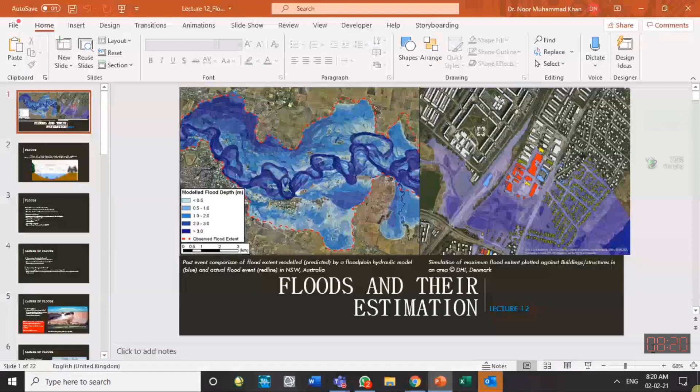In the last part of the previous lecture, we started the topic of floods, and we already informed you what is a flood. It is a high level or high stage in the river. How high? When the level or stage goes beyond the full bank capacity of the main channel. The main channel is in the middle, which remains underwater throughout the year. When water level goes beyond the banks of the main channel, then we say flooding is there.

Initially flood occurs on the flood plains. This area on the sides of the river is called floodplain. Those people living close to the river know the other name for this place. Any person living close to Indus or Chenab, what do they call this place? The area along the river, what do we call that place in local language?

There are sometimes forests over there. So we call this place the Kacha, Kache ka ilaka. That is all along the Indus River on both sides. There is a strip on both sides of the river where flooding occurs frequently, nearly every year. And when flood recedes, the flood water leaves very fertile soil over there, clay and silty soil, and that land is very fertile with respect to crops and agriculture.

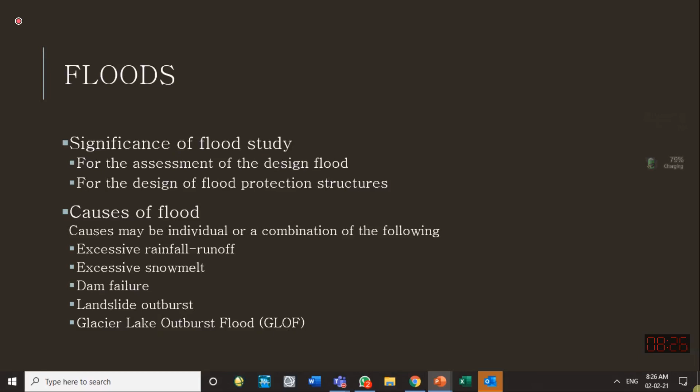A few years back in Pakistan, one GLOF event occurred, and some structures of our newly constructed hydropower were damaged. I think the Batura glacier lake outburst flood was an example of that. Such floods occur in the Himalaya region, in the Karakoram region, which are the source of water for Pakistan. These GLOF events are increasing because of climate change, so we should at least know what GLOF is.

But still, vigilance should be carried out. We have to remain vigilant to see if any symptoms of failure are there or not. So one example of such a landslide...

...reservoir or landslide-made dam is what we call Attabad Lake in Pakistan, in Hunza, on the Hunza River on the Gilgit side. That is still there. I think it was formed in 2005, 2007, or 2010, so about 10 years have gone. The slide has not yet broken, and a beautiful lake has been created there.

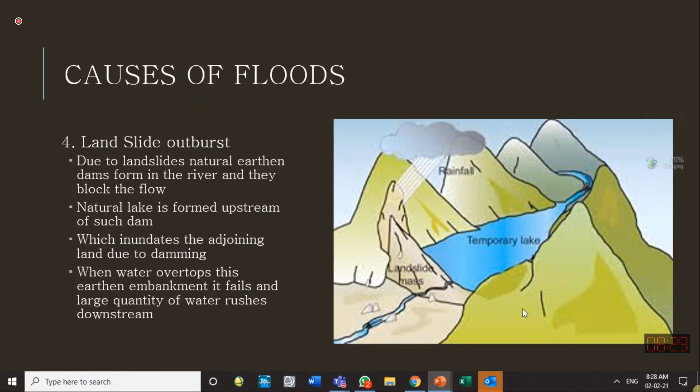For dam break, the landslide and the glacier lake outburst flood, in all of them a dam condition has been created. In GLOF, the dam condition has been created because of the glacier, pieces of the ice broken from the side glacier. While in case of landslide, a whole mass of the hill stops the flow of water in a channel. While in case of dam, our engineers have built an obstruction in the path of the flow. So any of them, if broken, can cause flood downstream. But these should not occur.

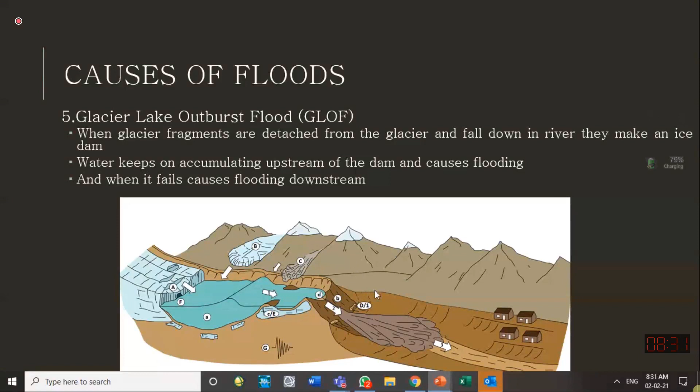They cause huge floods. Normal flooding which we get in Pakistan is because of the huge monsoon rainfall, excessive rainfall. Over here in Punjab, KPK or Sindh, we are getting monsoon flooding. So the season of flooding is July, August, and sometimes September. But in the western part of Pakistan, like Balochistan, the coastal area, sometimes we get the flood not in monsoon season but in February, when the westerlies are strong. Then they get huge flooding, and sometimes dam break flood also occurs in February.

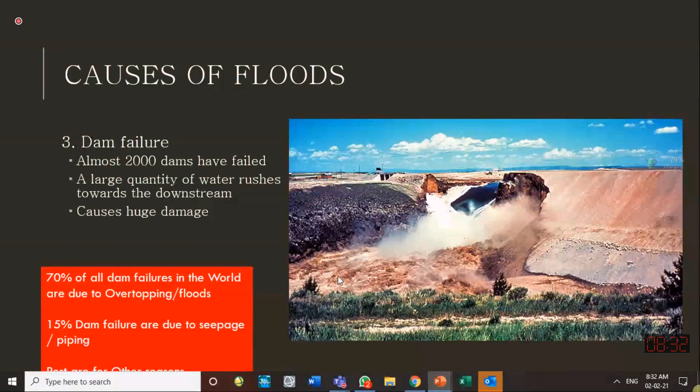So in the eastern and central part of Pakistan and in Sindh, we get flooding in monsoon, but we can also get flooding in winter season because of the heavy western storms. One of the dams failed in Balochistan, named Shadi Kaur Dam. That caused loss of lives, and it failed in February because of the huge rain. The capacity of the spillway was not sufficient. Water flowed over the dam, and when water flows over, dam break occurs. The dam cannot withstand that overflowing water.

So now, knowing what a flood is and why they occur, we engineers are frequently asked to tell the design flood. If you are constructing a new structure, tell us the value of the flood for which this structure should be designed, for which the spillway should be designed, for which the opening within the bridges, how much path of the water I should provide. That controls the length of the bridge. So what should be the design flood?

Depending upon the importance of the structure, there are different ways to decide the possible floods. Some of the methods mentioned here are empirical methods. People have developed equations for estimation of the runoff for any rainfall, like we have studied Khosla, Lacey, and Inglis method for estimation of direct runoff if the rainfall is known. Similarly, people have given equations which tell the value of the peak flood generated by a certain rainfall in a certain region. We cannot have the same equation for all regions, so for different parts of India and Pakistan and the world, equations have been developed.

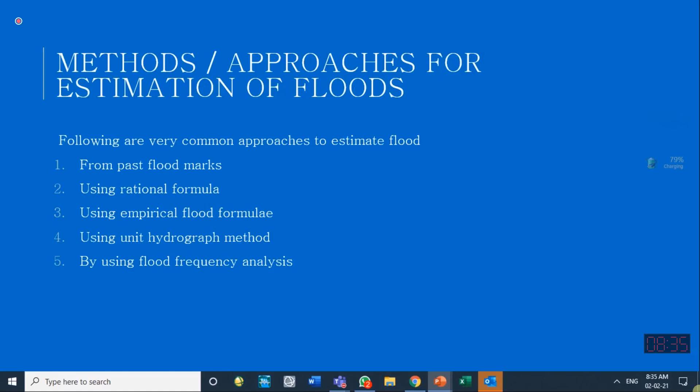So these methods are important, and we should be knowing it, and we should be knowing which one should be used in the area of our interest. And if the historical flood values are not with us, sometimes we go to the site and ask the people of the old age, those are elderly people. We ask them within your memory, within your life history, or what you have heard from your forefathers.

So what was the water level in this area? What was the maximum water level observed in this area for a certain flood? So then they can recall their memory, and they can tell you that during my childhood or during that year, the water level reached in this area up to this level of the house or this level of the tree. So they can mark, or they can give the flood level they have experienced in that area.

So those flood levels, if we gather them from a certain area along a river, we can convert that water level into how much flood might have passed this place using our engineering formula, like Manning's equation. If we know the flow area, if we know the slope, we can estimate the velocity using a suitable Manning's roughness coefficient: v is equal to 1 over n, R power 2/3, S under root.

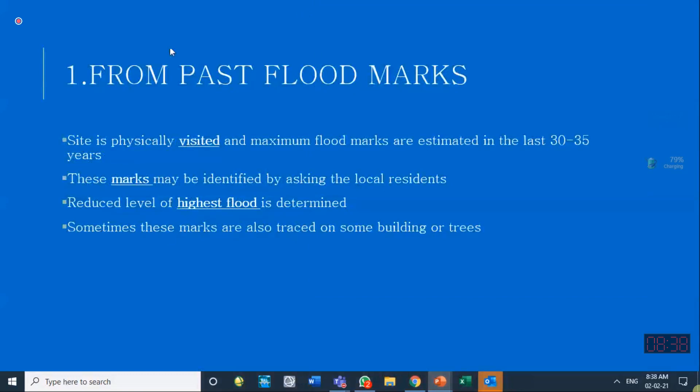And so knowing the average values of n for different kinds of rivers, we can select a suitable n value, and then we can calculate v, the velocity of that flood. If velocity is known, multiplied with the flow area, you get the discharge of that flood. So that is the way. If we don't have the measured discharges at that place, if we don't have a gauging station there, then we can use this flood marks method from the previous flood marks while visiting the area.

But if we have the data of the floods measured there using the gauging station, then that is the best source. That is the best source. So that is what I have talked to you about: if some flood marks are with you, you can mark them on the cross section of that river, find R, have S, and then you can have the velocity, and then discharge can be found.

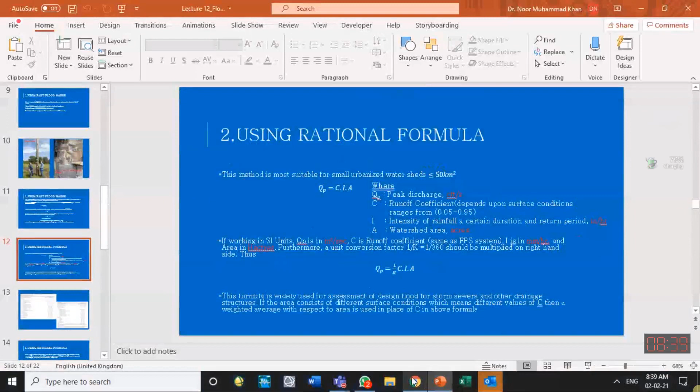One of the mics seems to be on, so please switch off your mics other than me.

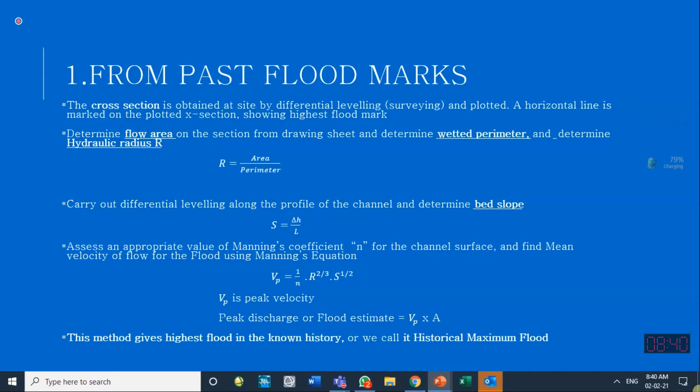Like the rational method we can use for estimating the direct runoff. Similarly, the rational method, this method we studied in flow estimation also. Flood is a special kind of flow, so the same method can be used for estimation of flood peak runoff also. So peak discharge we can estimate as CIA.

This C is the coefficient which is dependent upon the type of the catchment, dependent upon the watershed characteristics, whether it is releasing a lot of flows, whether it is losing a lot of water of the rainfall. I is the intensity of the rainfall for which we want to find the flood. Usually the high flood will be related to the high precipitation levels. So first we select the maximum precipitation for which we want to find the flood. So I is the intensity of the rainfall in a certain duration and return period.

This return period will be discussed later on. There are two ways of selecting the design flood for a certain structure. One is based on the return period, and one is based upon the probable maximum flood. The return period concept is that floods of higher values have less chance of occurrence. So a flood of 100-year return period is expected to occur once in 100 years. So its value will be higher as compared to a flood whose return period is 50 years; that value will be less.

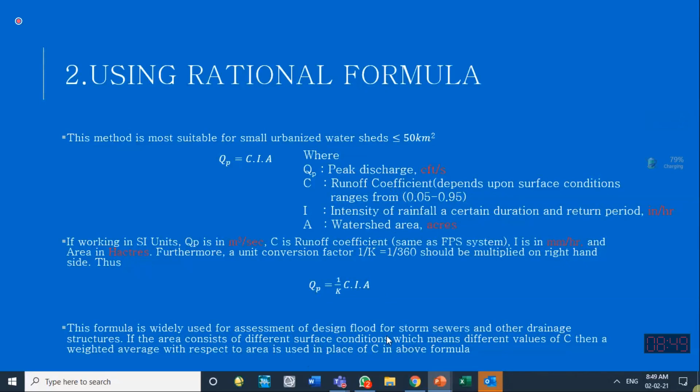So if we have multiple areas, different conditions in the watershed area, then a weighted C value will be calculated. So here is an example. In literature, large tables are available which define the watershed area type and propose a runoff coefficient. This range is also quite high, so we have to use some judgment of our own to select a proper C value. Usually, to avoid any risk, we go for the higher values of C because we are calculating the flood values.

So residential area 0.3 up to 0.75 is possible. Industrial area 0.5 up to 0.9 is possible depending upon how much industrialization is there. So as I say, more impermeable area, higher will be the C value. If 100% is impervious, 0.9, 0.95 can be taken because some evaporation will be there. This table is given by the American Society of Civil Engineers.

So this is one of the methods which people use to calculate the design flood for smaller structures like culverts under the bridges, for designing the urban sewerage system or urban drainage system. People rely on this method heavily. This is quick and this is easy.

So this one question you have to carry out, to calculate the flood peak or flood discharge for an area with the design rainfall. This rainfall is not selected as any rainfall of the previous year. They have thought about for what return period we want to design this structure.

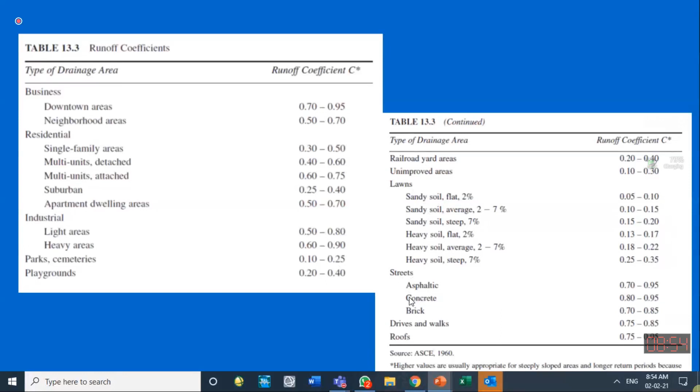So they have given that the C value for the rational method is 0.4 where the forests are there, 90% of the area covered with trees. And there is a 10% area which has no forest, but it has exposed rocks, like an impermeable area. For that, the C value is proposed as 0.8. If you are doing an actual problem, you have to select this C value based upon a visit to that area, knowing which kind of land cover is there, and using the tables available from the American Society of Civil Engineers or other sources.

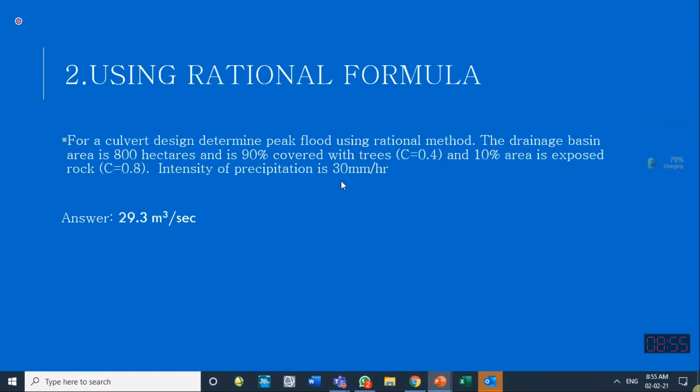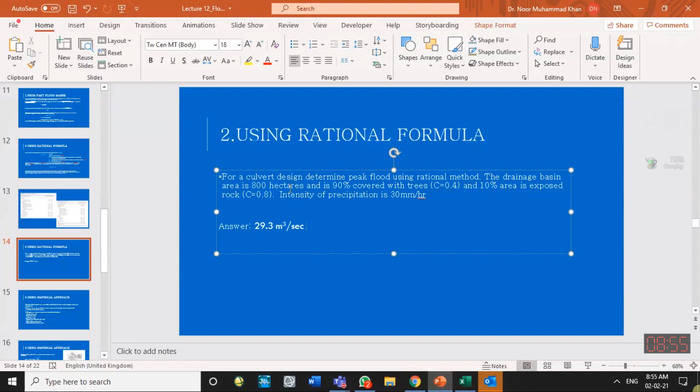So intensity of the rainfall is 30 millimeter per hour. So this has to be calculated. In this formula, use the one which is good for the SI system. And 1 over K times CIA you have to calculate, and take care that you select suitable units. For example, I could have given you area in acres, rainfall in inches per hour, or area in square miles or square kilometers. Then you have to convert them into suitable units; that should be taken care of.

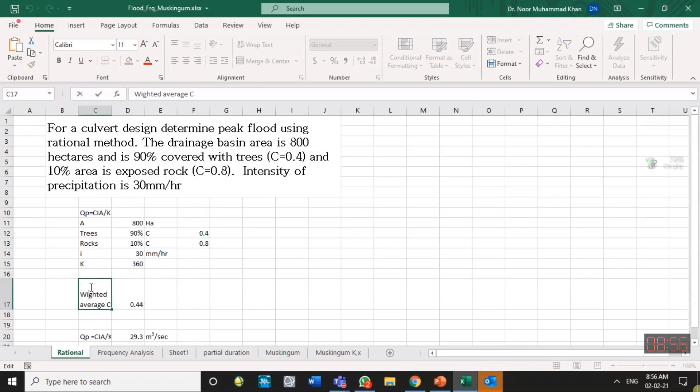So in Excel I have done this same question with the rational method. Area is given for trees, 0.4 is the C value, 90% of the area is covered with trees, 10% area is covered with rocks, its C value is 0.8. So first we have to calculate the weighted or average C value. That is based upon the percentage of the area: we multiply them with the respective C value, and we add them together. For example, 90% multiplied by 0.4 plus 10% multiplied by 0.8 will give me the weighted C value. So that is calculated here.

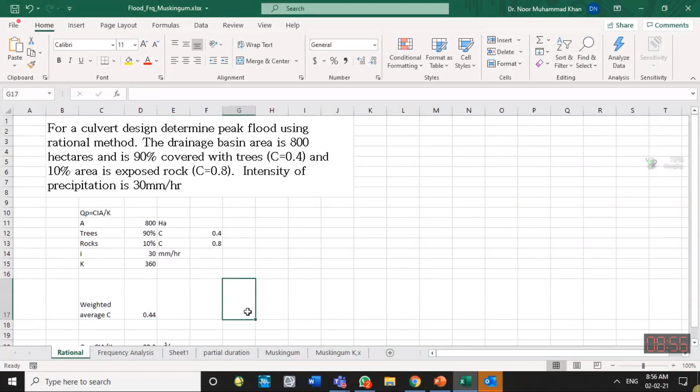So if you have to select it, can somebody check? It comes out to be 0.44 weighted C value: 0.9 into 0.4 plus 0.1 into 0.8.

That comes out to be 0.44. So I put it over here. And then the formula is 1 over K into CIA, or CIA divided by K. So that comes out to be 29.33. Please solve it yourself and try to understand it.

It's a simple method, can be used for smaller structures. Usually if we are doing the design of dams or large structures, then we don't rely on this rational formula. We go for other methods of flood estimation.

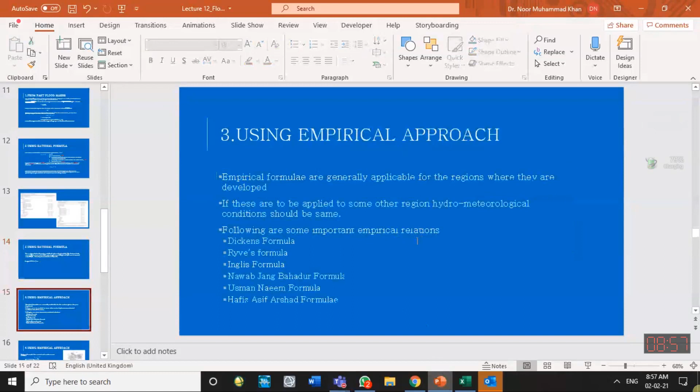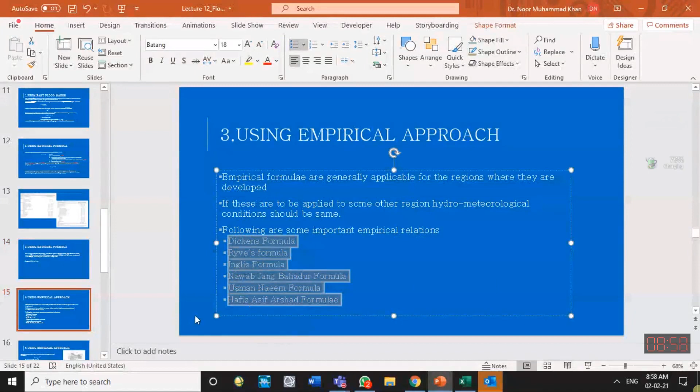Okay, what else? Empirical approaches are there, like Inglis, like Khosla, like Lacey. A number of formulas give us flood values in a certain area. For example, for India, there's a formula known as the Dickens formula. Q peak is equal to a coefficient times area to the power 3 by 4.

So no parameter of rainfall is there because I think that is inbuilt inside it. Depending upon the area, they know how much is the maximum precipitation in that area.

Another formula given by Ryves for the central part of India: if the area is within 80 kilometers from the east coast, then a C value of 6.8 is used. If it is away from the coastal area, 8.5 should be selected, and for other limited areas near hills, 10.2. So he proposed a slightly different formula, C1 into A power 2 by 3.

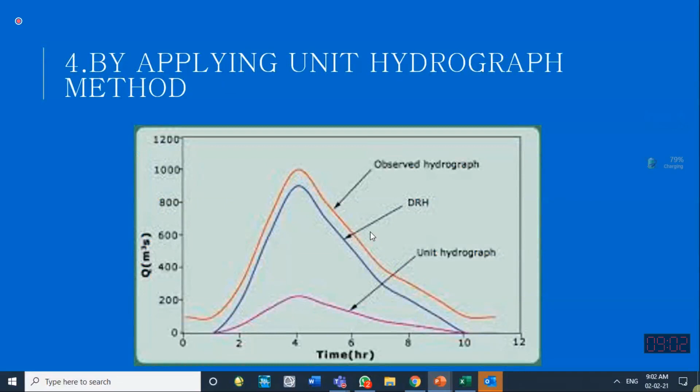Frequency distribution method. After the break, I will tell you what frequency is and how to calculate the frequency of different flood events.

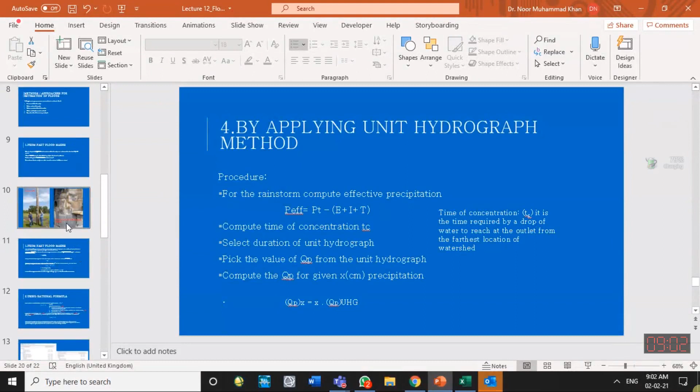How to estimate the flood? Why floods are necessary to be estimated? How we can select a design flood? That is more important. Based upon importance, based upon the life, based upon the risk we can take, we select design flood. And for selection of the design flood, we have to rely either on a probability approach, frequency distribution approach, or based upon the return period. Both have inbuilt how much risk we can accept.

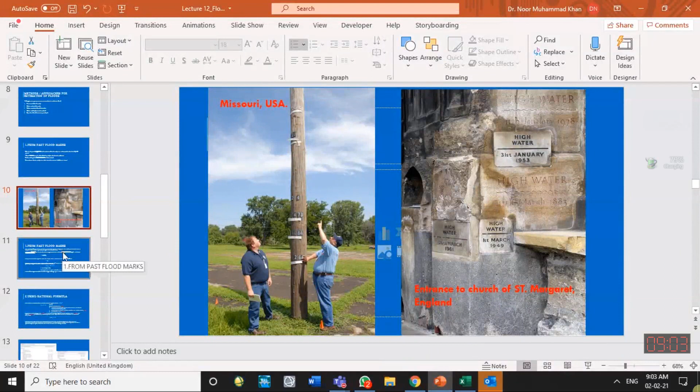So in this Dickens method, they have given the C value for different parts of India. Why are you saying this is not applicable for whole India?

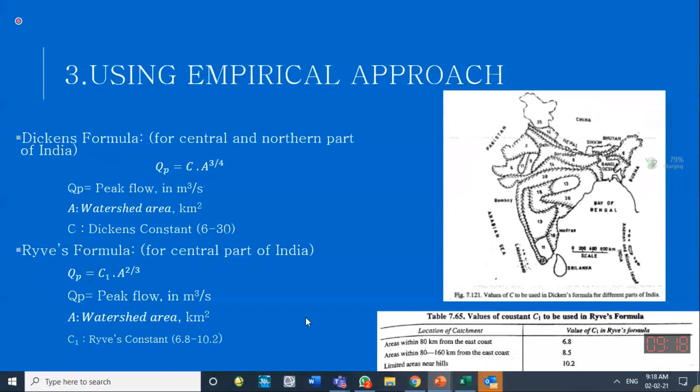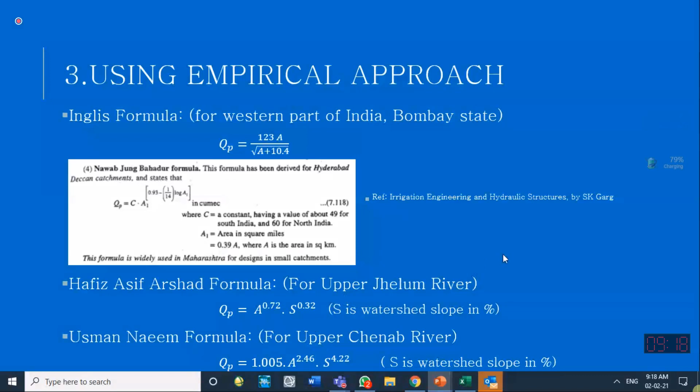This is for Bombay and Deccan only, this method. So hopefully Bombay meteorology seems to be similar to Karachi, I think, coastal area, our coastal area with theirs. And the western part of India is this Gujarat area, which is close to the Tharparkar and Sindh area. And here are for Upper Chenab and Upper Jhelum River. In more Pakistani literature, if you search, you will find some methods, because books are mostly written by Indians, so we get those methods over there.

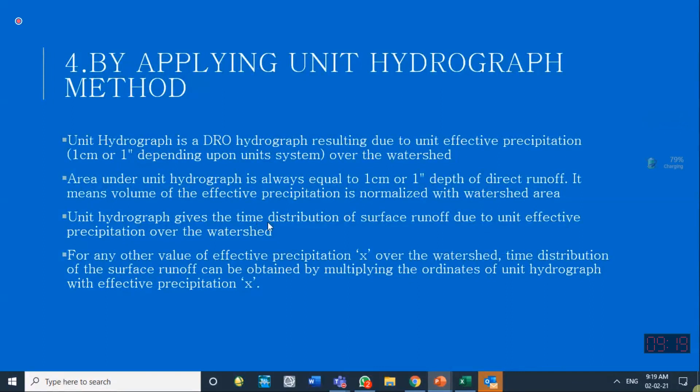Okay, hydrograph, we have gone through this. So this topic is in continuation of this topic. Flood frequency analysis, I have made it separate, although it is part of this flood analysis method.

If we have a series of flood data available to us, observed rainfall for several years, or flow data for several years, we can apply statistical methods, and one of these is frequency analysis, to calculate the return period of a certain flood.

What is the return period of a certain flood? In these few slides, we will explain how to carry out flood frequency analysis to calculate the return period of a certain series of floods.

Keep in mind, not every flow is a flood, but floods are observed or recorded in the same way as flows. We have a gauging station at a location, and in a year, if the maximum water level at this stream reaches a certain level, we can convert that maximum water level into a flow or flood value using a rating curve.

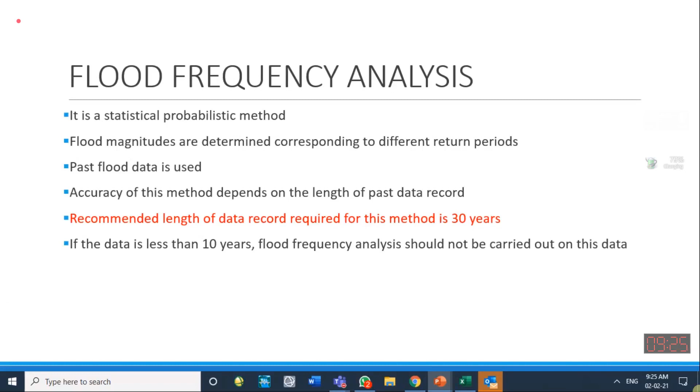The definition of the frequency. We know what frequency is with respect to electricity. We have heard it; the frequency of our voice is known to us, the frequency of light is known to us. So frequency is a word which is common to us, but frequency with respect to flood is the number of times that a given magnitude flood occurs in a given period: the number of times that a flood of a certain value occurs in a certain time period.

So knowledge of the magnitude and probable frequency of recurrence of flood is necessary for the design of structures: bridges, dams, levees, culverts. For effective management of the floodplains, frequency is required, and frequency is related to the time period, to predict possible flood magnitude. These things I have discussed earlier.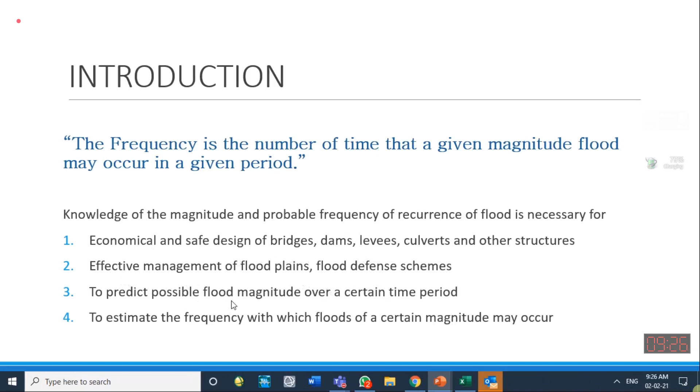So flood series can be categorized into two types. One is the annual flood series, and one is called the partial duration flood series. The annual flood series records the highest momentary instantaneous peak discharge in a water year.

If we are measuring flow on a daily basis, and you see that record developed by the irrigation or water department, they will mention the daily flow, and at the bottom of the record they will mention the instantaneous or momentary peak discharge observed during the whole year. That they calculate from the highest water level observed. The daily flow is the average of one day's flow. So don't think that the daily flow of a certain day is the momentary or instantaneous highest peak.

So if you are getting the flood data from the relevant department, WAPDA or irrigation, sometimes they only give you the flow data. For flood analysis, particularly ask them: I need the annual peak flood data. They might have it recorded separately, and that data you need. The annual peak flood is the instantaneous or momentary peak discharge observed in that stream within the whole year. It will be one value.

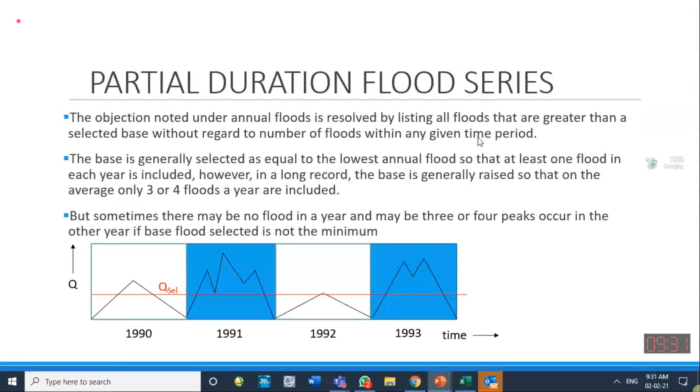First we have to find the data. So you will be finding either the annual flood series or you can specially collect the partial duration flood series. If the flood series is with you, then you can calculate its return period, you can calculate the probability of occurrence of each flow, and then you can carry out the analysis on that.

So if you have the flood series available, then the return period is actually the inverse of the probability. And probability is defined in the statistical books as the measure of likelihood or possibility. Probability is the science of possibilities. So probability is a measure of likelihood that an event will occur in a random experiment.

A random experiment is that experiment whose outcomes are random. We cannot forecast. So that is called a random experiment. For example, if you toss a coin, it has two sides. If we say that there is no possibility that it will be standing, then either one side will be the result of a tossing experiment.

If that coin is well made and it is not heavy on one side and light on the other side, or nobody has made any changes to it, then there's a 50% chance that head will come and 50% chance that tail will come. And we cannot forecast that head will come more because this is an unbiased coin. So the likelihood that head will come is 50%.

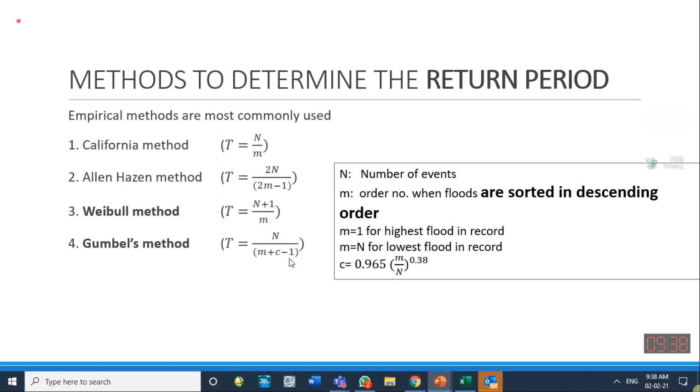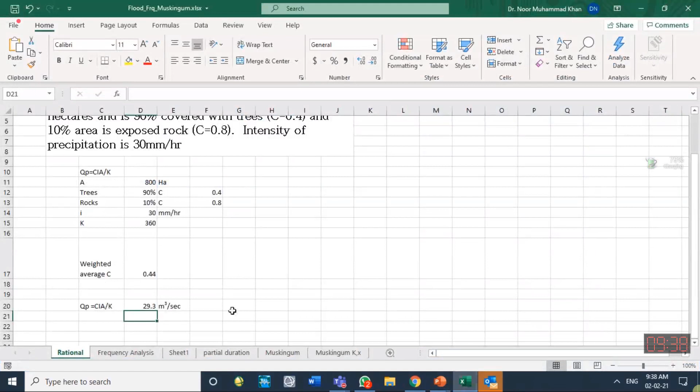If this is the flood data of the last 10-20 years, of course in an actual case you will be working with data of at least 30 years. Just to reduce the work, only 10-year, 12-year data is given over here. So the method is: order them in descending order, give them a rank M, and then calculate the time period using the Weibull, Gumbel or California method, and calculate the probability. So you will be getting the return period of each of these flows. It has been done in Excel, and you might have to carry it out manually in the exam also.

So if discharges or floods are there, the California method is simply the total number of events divided by the rank of this event. M is written over here; after the descending order arrangement, they have been written as M. So that gives the California method. For the Gumbel method, first we have to calculate the C value, and within the C value, M over N is required. So M over N is calculated, then C is calculated, and then the time period is calculated. Similarly, the Weibull method can give you the time period. If the time period is with you, take the inverse of that and you get the probability.

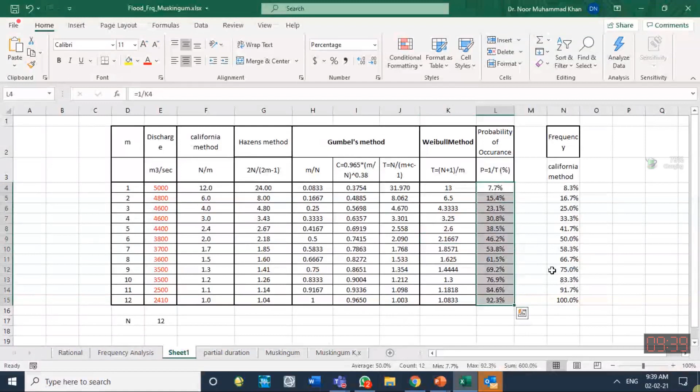And then we can draw their curves also. The frequency distribution curve can be drawn in this way. Usually we draw it on log curves. On the x-axis we draw the return period. On the y-axis we draw the flows or floods. So that is how we carry out the flood frequency analysis to calculate the time period or the probability of occurrence.

Sometimes students ask, what will be the return period for floods having the same values? If there are 2 years having 4600, what time period should we mention? So there is a flood of 4600 with a return period, in the Gumbel method, of let us say 4.6 years, and the same flood of 4600 occurred in another year also, with a return period of 3.3 years. So what should be mentioned?

It is safe to mention the lower value, because we can expect that a flood of 4600 will occur every 3.3 years. Specifying it as 4.6 years means you are taking more risk. So 3.3 years is safer. Specifying the lower value, I think, is safer. So that is the review of how to carry out the flood frequency analysis.

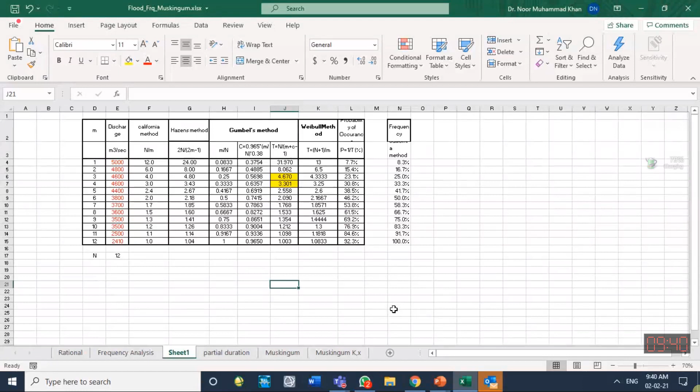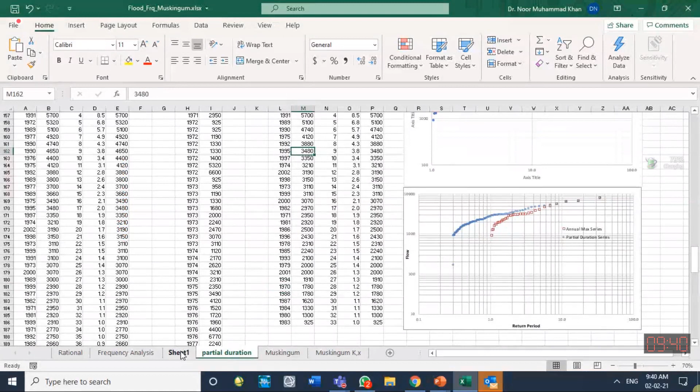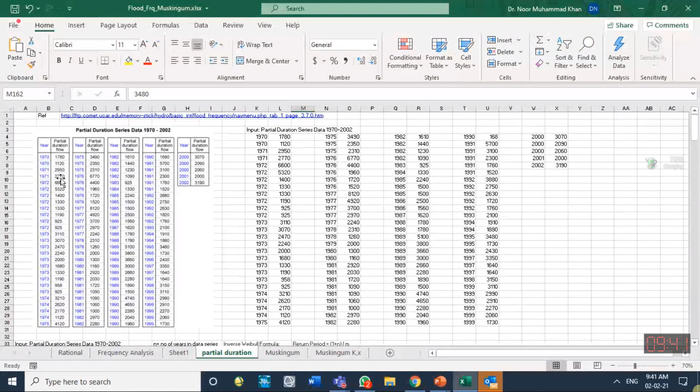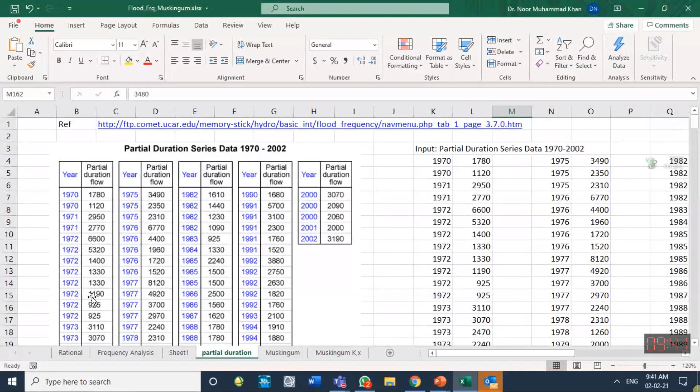And if you have the flood frequency curve available to you, as I have shown you over here, actually I have gone a little bit ahead, which was not done previously. I got a partial duration curve from a certain site over here, and here is the reference. The method for the partial duration curve is the same; only you see the difference. If I zoom in, for the same year they are recording floods of more than one peak. For 71 they have recorded 2. For 72 they have recorded 5, 6 values. So this is a partial duration flood series.

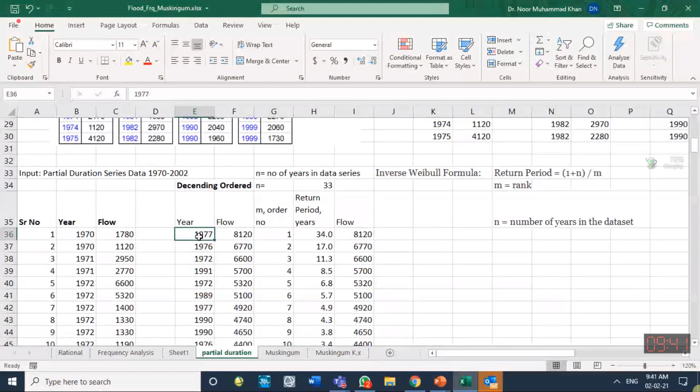So the method for analyzing them is the same. Write them in a column, and then sort them in descending order, and then calculate the M value for them, and N should be taken as the total number of years of that record. N should not be the total number of records. The total number of records in the partial duration series is, let us say, 113 data, but this is data of 33 years. So N should be the number of years for which this data is there.

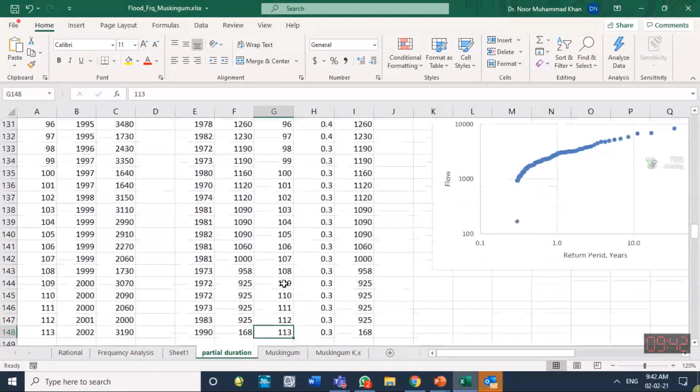So the only difference is this: in frequency analysis using the peak flood, the N value is the number of years or number of records, both are the same. But in partial duration curve, this N value is the number of years. Don't count the number of records. While small m, which is the order of that record, varies from 1 to the highest value of 113, whatever are the records. Then the rest is the same.

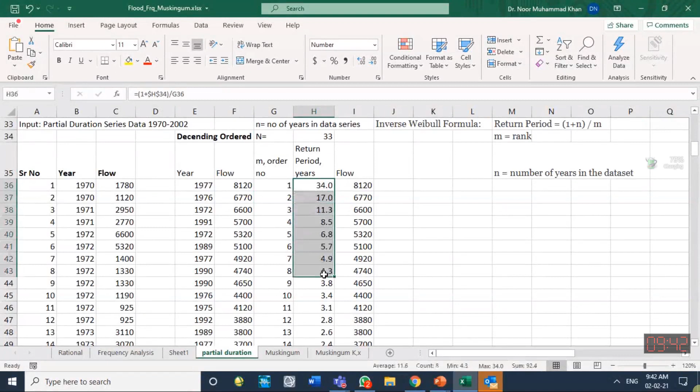Return period is calculated as the inverse of the Weibull method, so 1 plus n divided by m. So we can calculate the return period, and we can calculate the frequency also. If we draw the return period calculated based upon the partial duration curve or based upon annual flood series, both can be compared in this way.

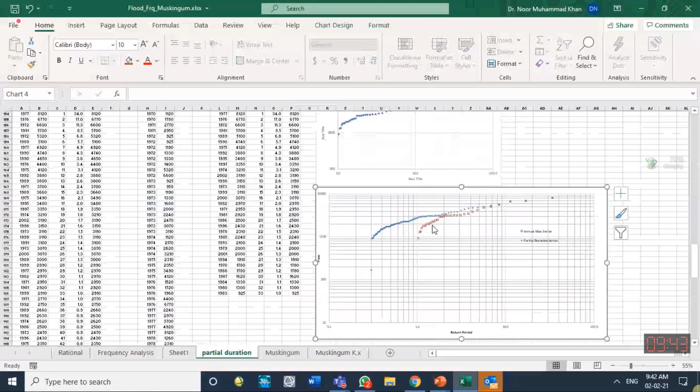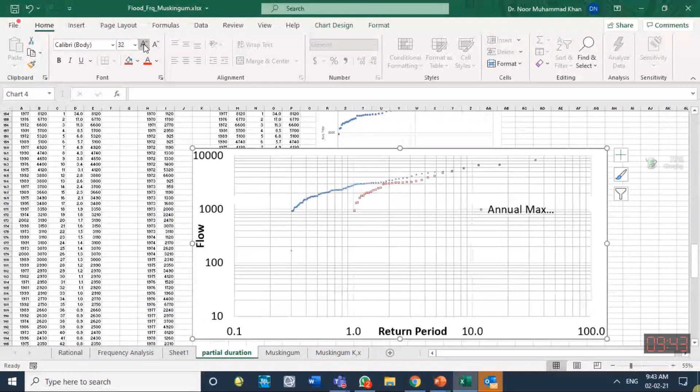This red one, can you see them? These red ones are annual flood series. These red ones are annual flood series, and these blue ones are the partial duration series for the same station, for the same location.

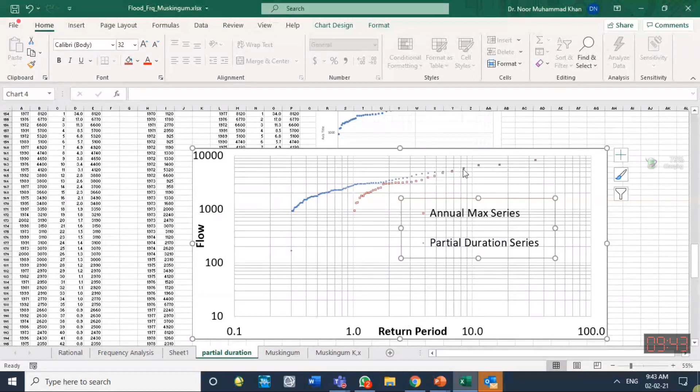For the lower return period, they vary a lot, but for higher return period, when they approach the number of years of the data, like 33 years, they are nearly similar. They are giving us similar results. So both yield similar results for higher return period, but they deviate a lot for the lower values. So that should be kept in mind while using any one of these methods.

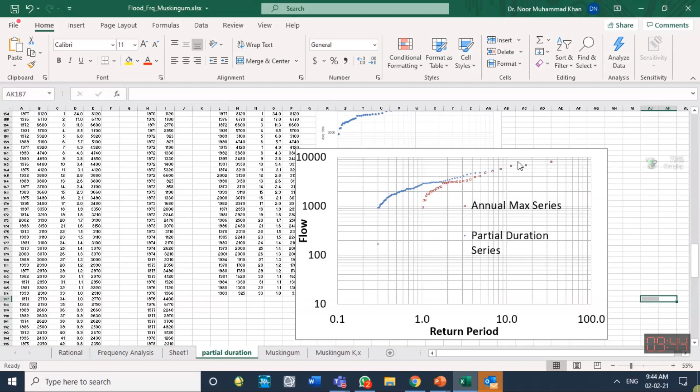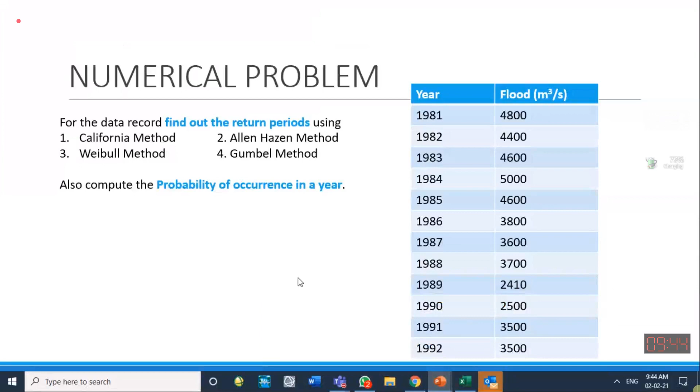Usually we use the annual flood series, because our return periods are quite high; we want to design the flood of 100 years, 200 years, 50 years. So in that case, partial duration and annual flood series yield nearly the same results. They don't deviate much. So I stop this topic over here. If you have any question on this topic, you are welcome to ask. I think it's finished after this.

So you should be knowing how to carry out flood frequency analysis. There are two kinds of series which can be used for flood frequency analysis. One we call the annual flood series, one we call the partial duration flood series. Both have objections, both have some drawbacks and some shortcomings. And mostly we use the annual flood series.

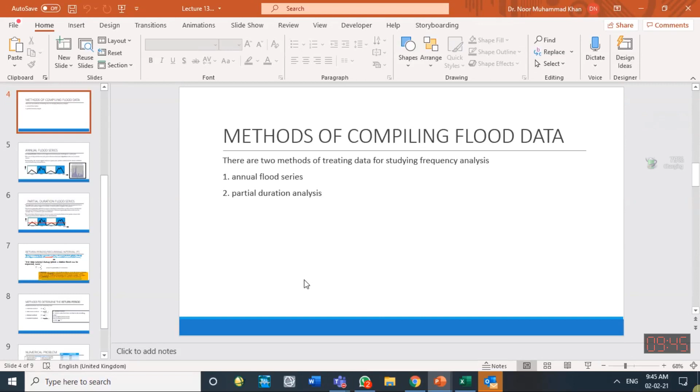So an annual flood series is the instantaneously or momentarily recorded flood which is maximum in a whole year, the annual maximum. If you have that series for 30 years, you carry out flood frequency analysis, and it can be carried out using the formula given by the California method, the Weibull method, the Gumbel method, and other methods, like the Allen-Hazen method. Any of these formulas can be selected. Usually we choose the Gumbel method to carry out the flood frequency analysis.

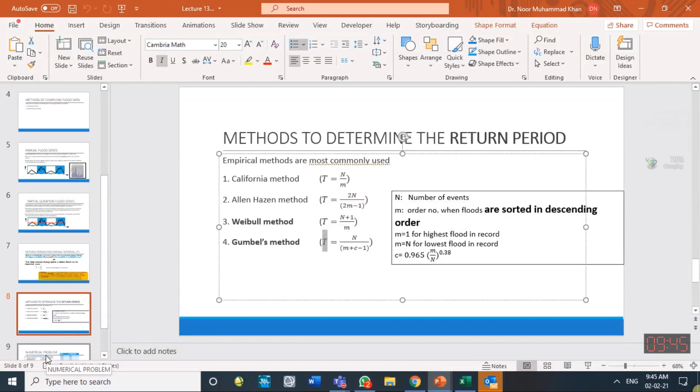And you calculate the return time period, or probability. Probability is the inverse of this. If you write this formula in inverse order, that will be probability. And we can estimate the return period for each flood, and we can make a flood frequency analysis graph using this data, and we can extend it.

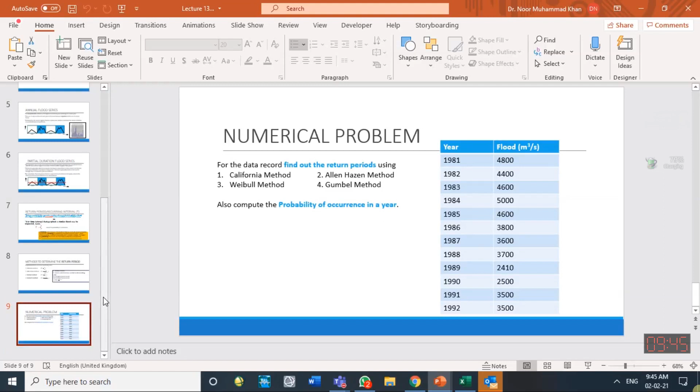Once you have the graph with you, you can extend it for another 30-year period. For example, over here it is 100 years. So if it is for 30 years over here, up to a 60-year return period you can calculate using this log graph.

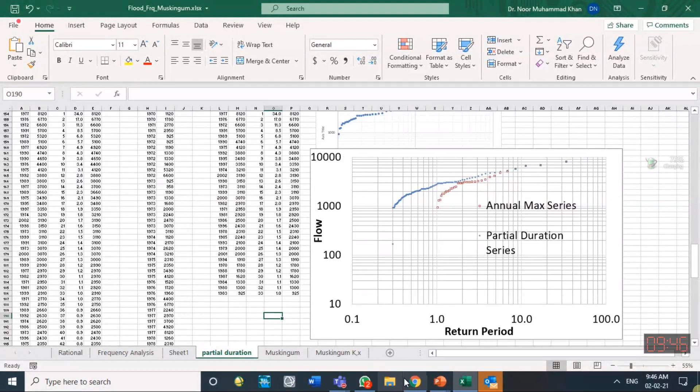Next, if you have a question, you are welcome. Otherwise, I move towards the next one.

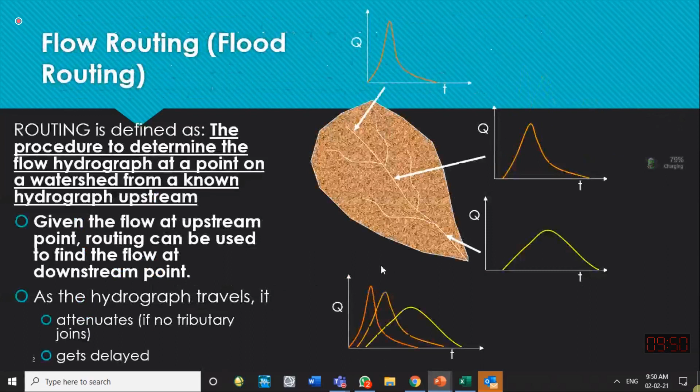If I show you the channel, when the flood increases over here, it increases its level. So there is a slope created within the channel. Water level will be higher at the upper place and lower at the lower place. So a prism of storage will be created in the upper part of the channel, which we call temporary storage, and water will also go to the floodplain area, which also works as temporary storage. The floodplains, or the prism created at the top of the water surface, can work as temporary storage.

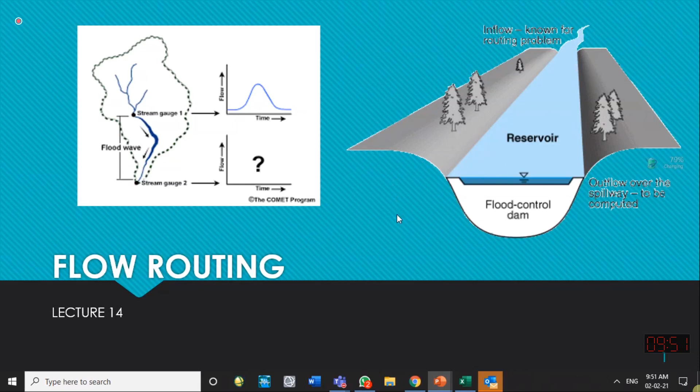So when a flood occurs, the water is temporarily stored in the channel, causing an attenuated or reduced peak at the downstream gauges. When the water reaches downstream, not all the temporary storage water reaches there immediately, so lower peaks are seen downstream. And when the discharge reduces, at the upper gauging station we may be experiencing lower flows, but at the lower locations the temporary storage now contributes, because the water level in the channel has reduced. This causes a larger base flow at the downstream gauges.

So for an increasing flood, temporary storage reduces the peaks downstream compared to the peak observed at the upper station. We say this is attenuation of the peak. While the flood is reducing or has stopped at the upper location, the downstream site is still experiencing flood. It means its base time period has increased.

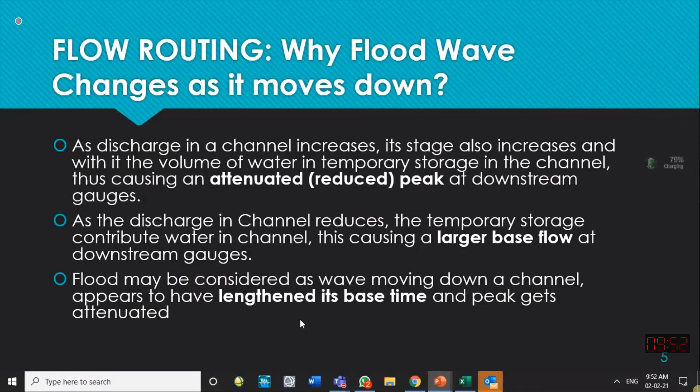The base time period of the flood hydrograph has increased. These are the reasons that change the shape of the hydrograph when we move from the upper station to the down station. There are two methods for this.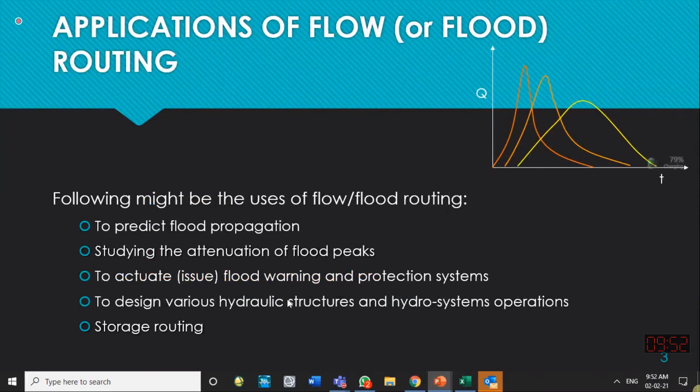One we call lumped routing, one we call distributed routing. We will study this next time. We need these routing methods known to us. This is a tool a hydrologist should know, because frequently he has a hydrograph at one location, but he is interested to find the hydrograph at another location. So flood routing, or flow routing, needs to be carried out, either by the lumped method or by the distributed method.

HEC-HMS is a software used in hydrology that carries out lumped routing. HEC-RAS is a software used in hydraulics that carries out distributed routing. What is the difference between them? We can go through it next time.